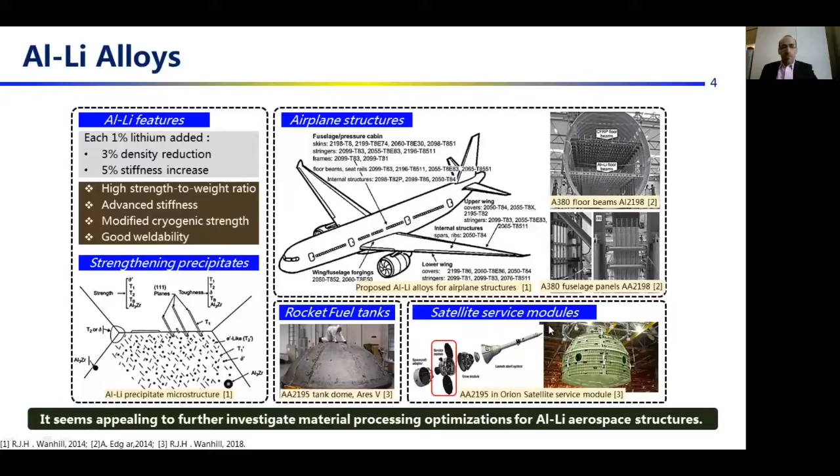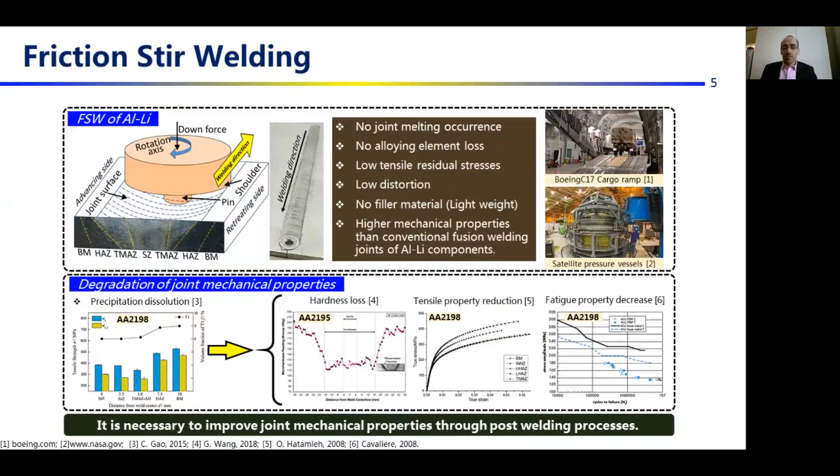However, the dissolution of precipitate phases during the thermomechanical effects of friction stir welding leads to the degradation of joint mechanical properties such as hardness, tensile strength, and fatigue properties in the joint center. So it's necessary to improve the joint mechanical properties by post-welding processes.

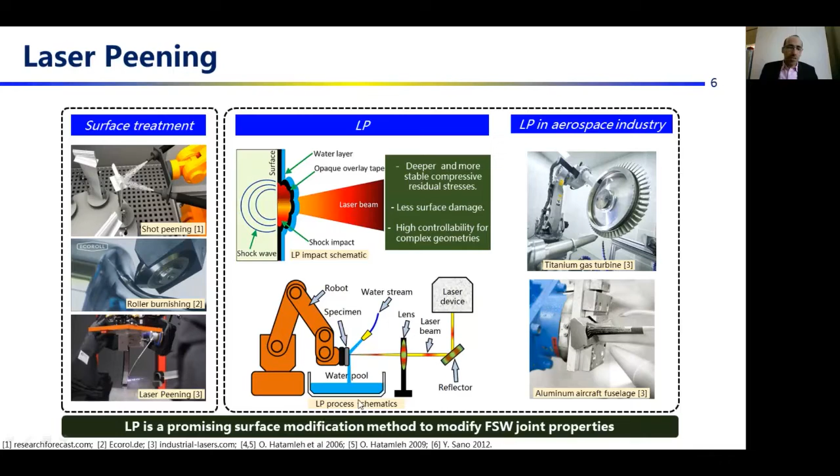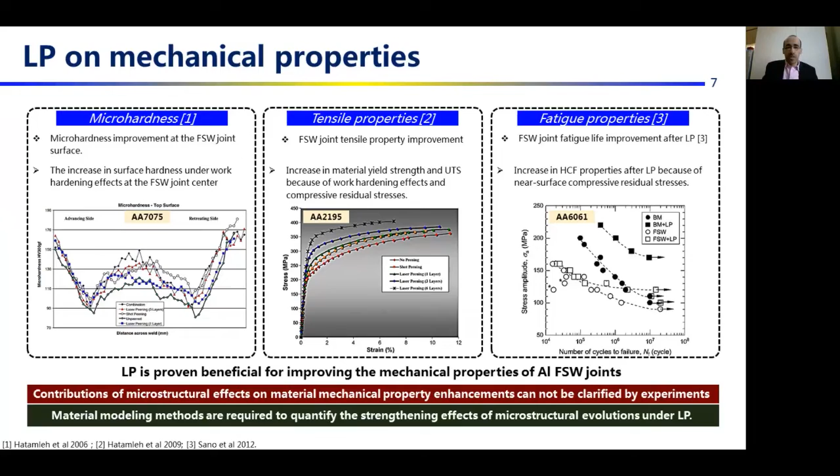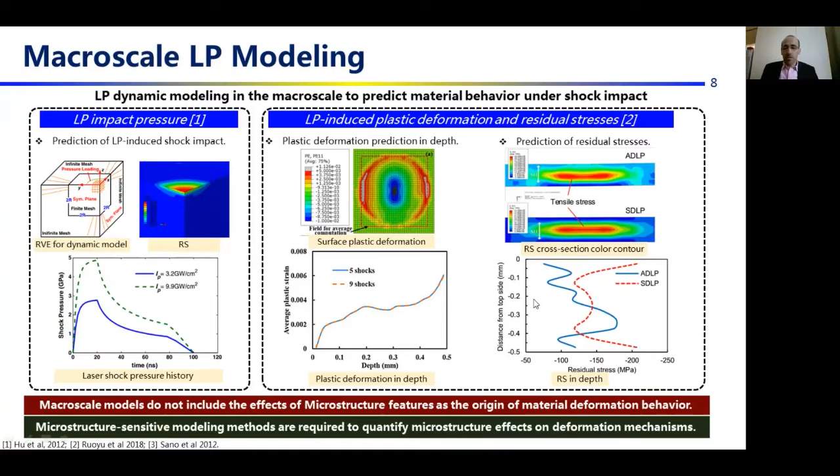Dynamic modeling of laser peening at the macro scale has been developed to predict the laser shock pressure history, as well as the material plastic deformation under laser peening and the resulting residual stresses in the material after laser peening. However, macro models do not include the effects of microstructural features as the origin of material deformation behavior. For this purpose, microstructure sensitive modeling methods are required to quantify the microstructure effects on the deformation mechanism.

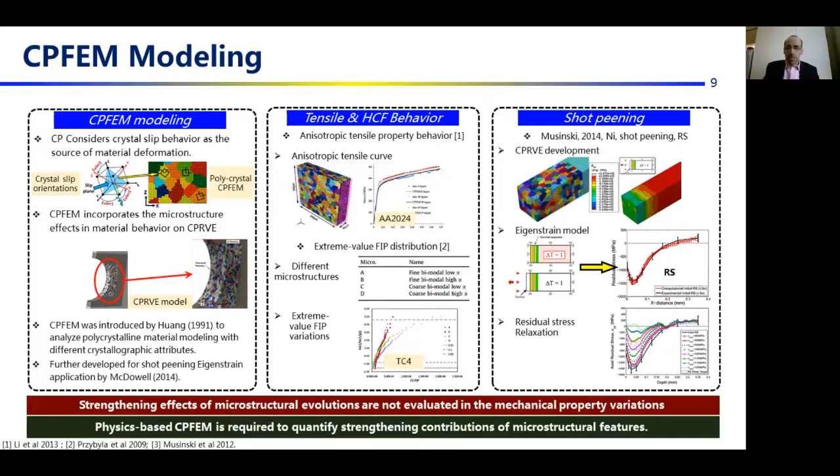However, the strengthening effects of microstructural evolution are not evaluated in the mechanical property variations in this process. For this purpose, physics-based CPFEM is required to quantify the strengthening contributions of microstructural features during material processing.

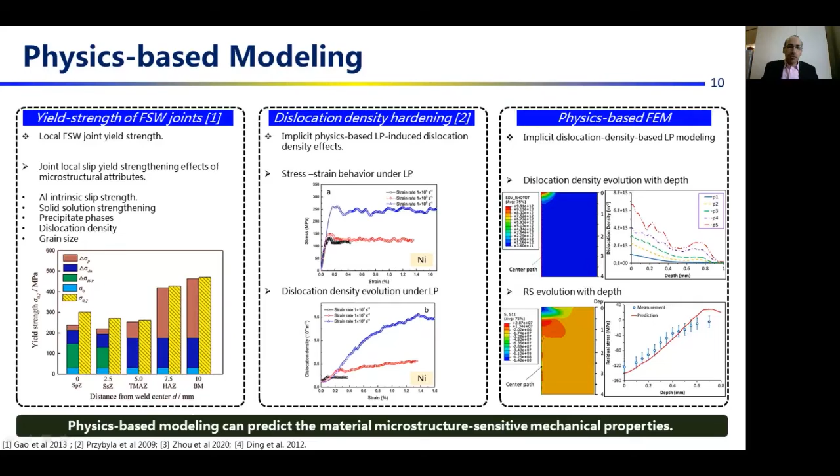To summarize the literature, CPFEM has been introduced to predict the microstructure-sensitive material deformation behavior. CPFEM shot peening models have predicted texture effects on the shot peening-induced residual stress distribution, and physics-based modeling methods also have been developed to predict the FSW joint local yield strength.

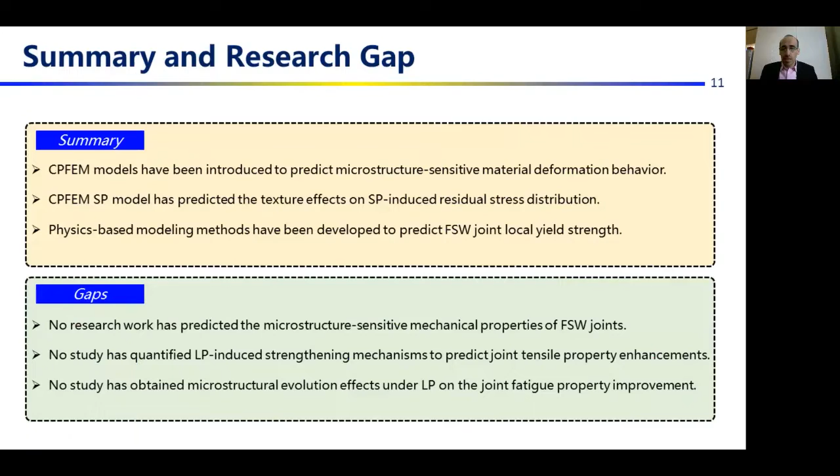However, no research work has predicted the microstructure-sensitive mechanical properties of FSW joints, and no study has quantified the laser peening-induced strengthening mechanism from the microstructure-wise perspective to predict the joint tensile property enhancement. No study has also obtained microstructural evolution effects under laser peening on the joint fatigue property improvement.

In this research, we developed the physics-based CPFEM model to quantify the strengthening contribution of microstructural variations such as precipitate phases, grain size, dislocation density, and crystal morphology during material processing such as FSW and laser peening, to predict the resulting mechanical properties such as tensile strength, fatigue strength, failure mechanisms, and mechanical property heterogeneity.

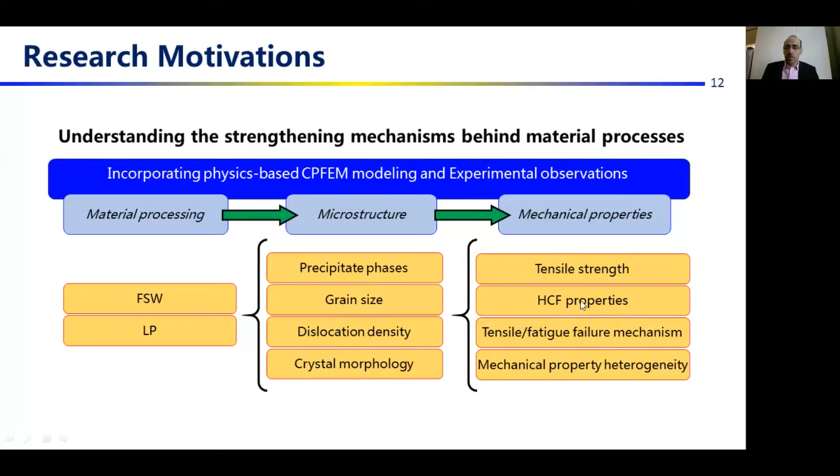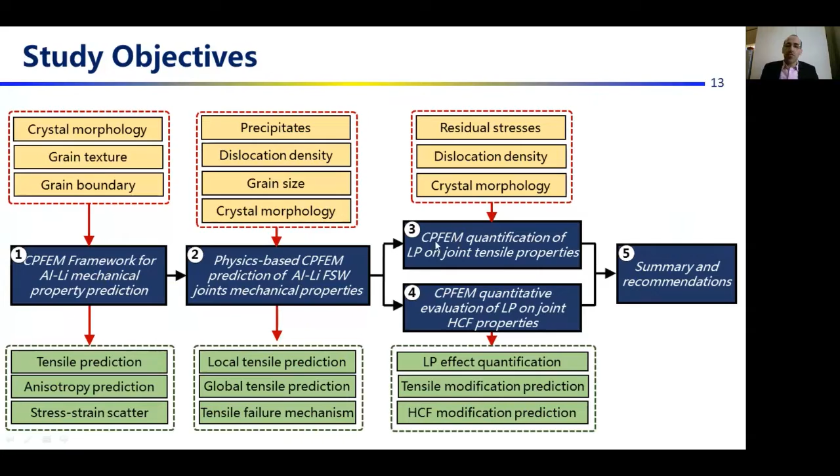For this purpose, a CPFEM framework is developed for aluminum lithium alloys to predict mechanical properties. Subsequently, physics-based CPFEM is developed to predict the microstructure-sensitive mechanical properties of FSW joints of aluminum lithium alloys, and the laser peening beneficial effects on their tensile properties and fatigue strength.

First, the CPFEM framework for aluminum lithium alloys. In this study, CP-RVE or CPFEM models are developed by extracting the microstructure, crystal texture, and grain morphologies from EBSD, and calibrated by mechanical properties from tensile tests. The developed model can predict texture-induced anisotropic tensile properties in the rolling and transverse directions, and grain boundary effects on stress-strain heterogeneity in the CPFEM model.

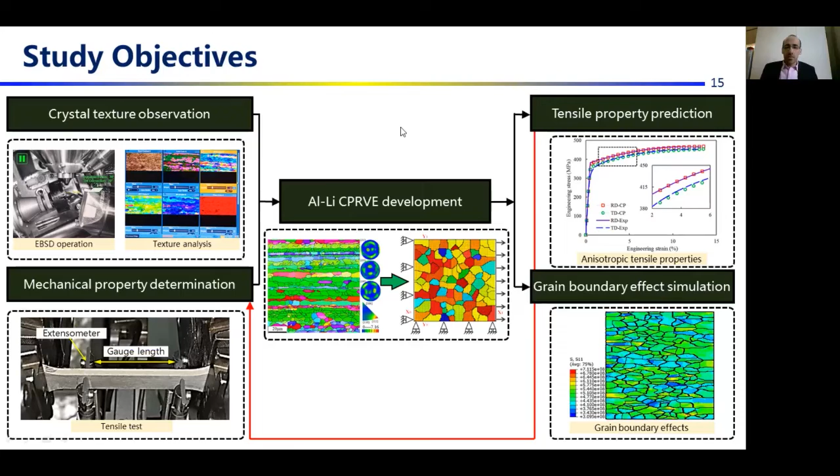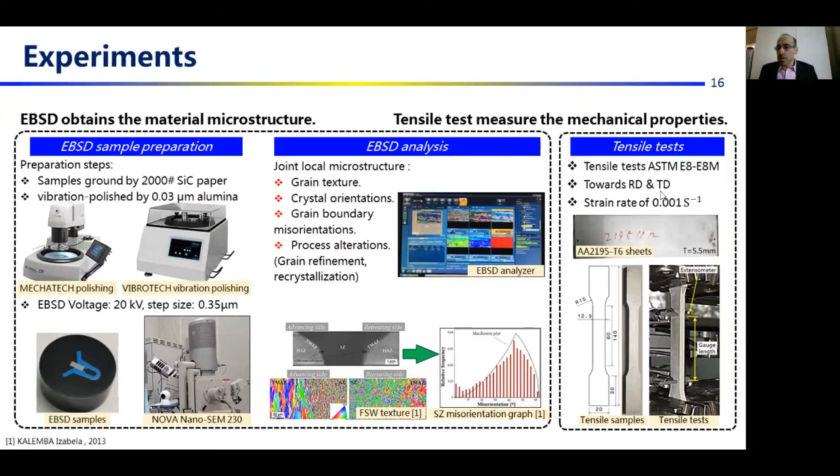For the experiment, EBSD obtained material microstructures such as grain texture, crystal orientations, and grain boundary misorientation. Samples are polished and vibration polished prior to laser peening and the EBSD test, which is conducted with a NOVA Nano SEM machine. Tensile tests also measure tensile properties along the rolling and transverse directions to obtain anisotropic material properties.

CP modeling includes considering crystal lattice rotation and slip as the source of material elastic-plastic deformation. It calculates the plastic velocity gradient, critical resolved shear stress (the slip strength), and flow rule, which defines the slip shear strain rate.

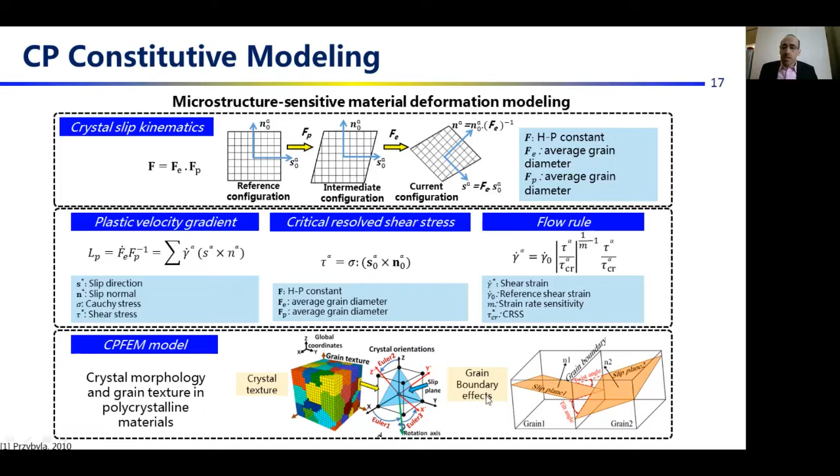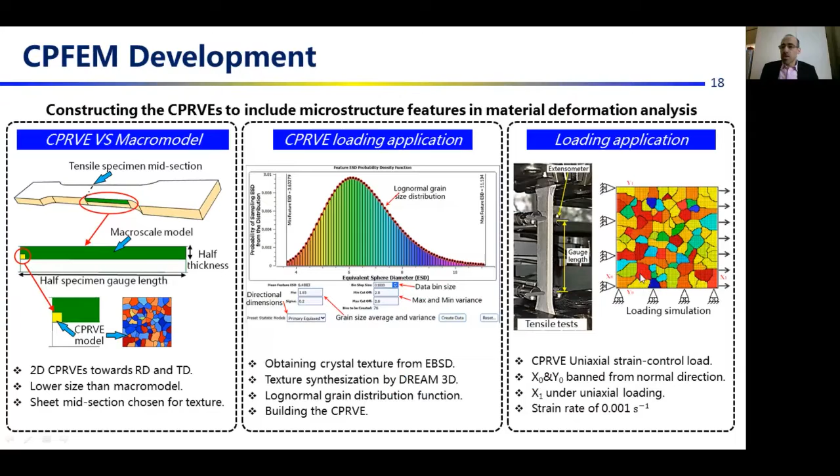The CPFEM model includes crystal texture and grain boundary effects into the microstructure-sensitive model. For CPFEM development, 2D CPRVEs are developed for rolling and transverse directions, and material microstructure is synthesized by DREAM 3D software into the CPFEM model. Loading application is simulated by strain-controlled loading on the CPRVE models to simulate the tensile test.

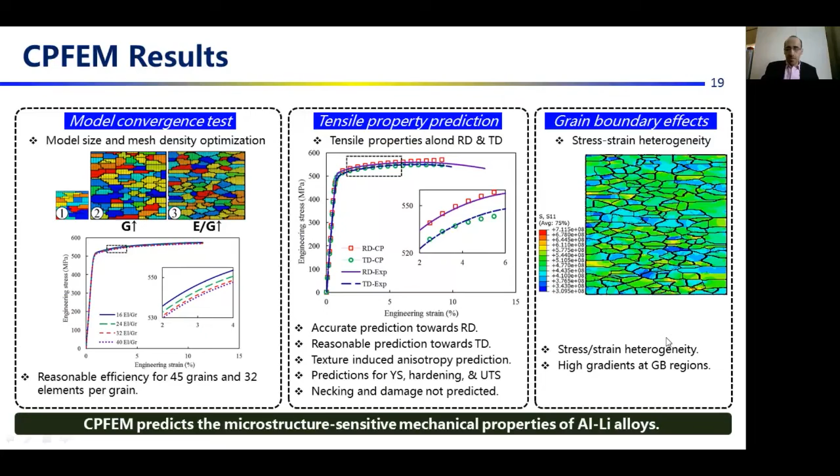As for the overall conclusion, the CP model can predict microstructure-sensitive material deformation behavior. The developed CPFEM model can predict texture-induced anisotropic tensile curves of aluminum-lithium alloys for rolling and transverse directions, and can also predict polycrystalline deformation behavior by including interaction between neighboring grains with crystal misorientation.

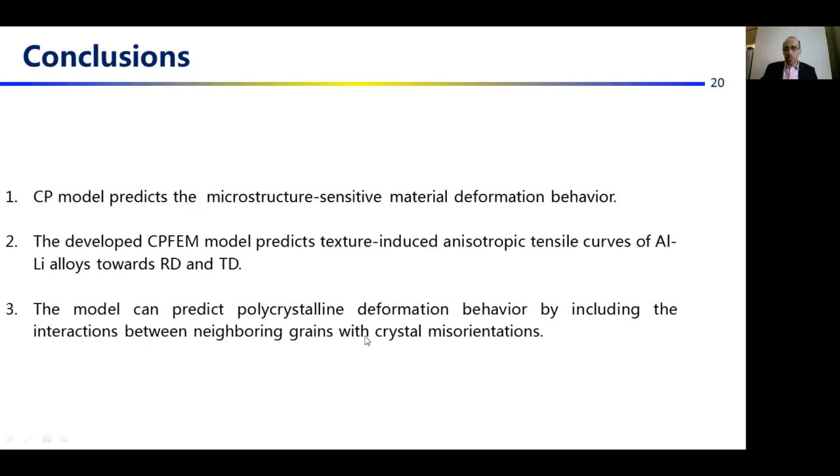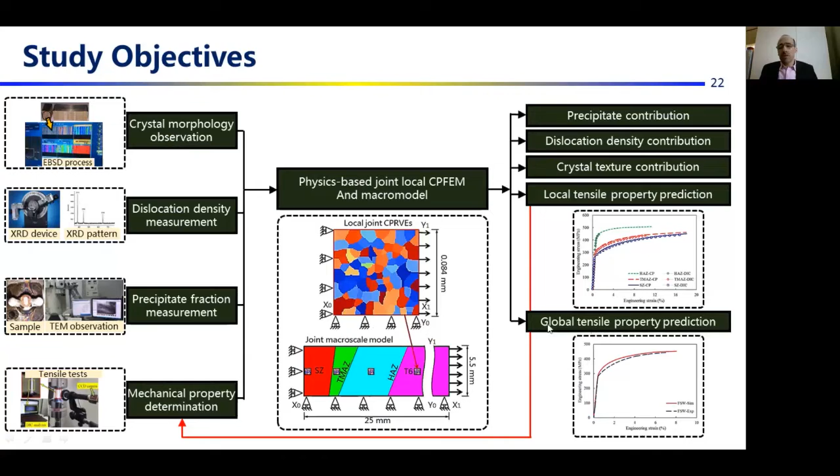Now, the physics-based CPFEM model for aluminum-lithium FSW joints. In this study, joint local physics-based CPFEM models are developed by including material microstructure attributes such as crystal morphologies, dislocation density, and precipitates. The developed model quantifies the strengthening contribution of these microstructural attributes to predict local and global tensile properties of FSW joints.

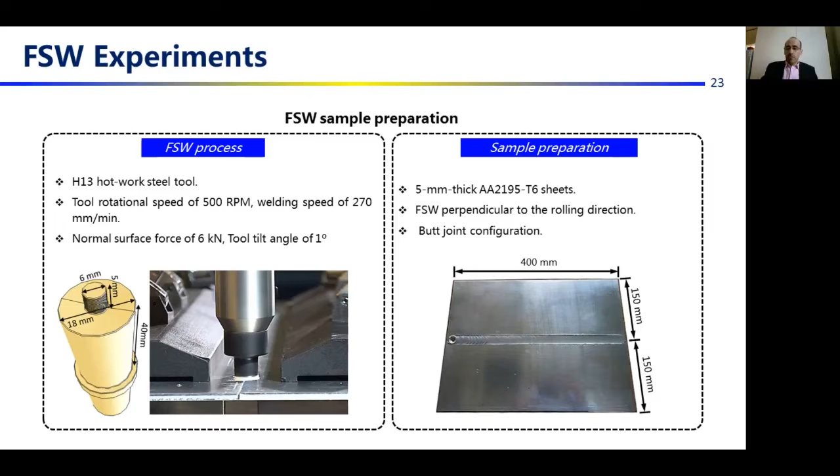For the experiments, FSW process parameters are set for optimum welding joint mechanical properties, and 5 millimeter thick aluminum lithium 2195 sheets in the T6 condition are joined together in a butt joint configuration perpendicular to the sheet rolling direction.

TEM tests are conducted, and the Talos F200X TEM device is utilized for the TEM test, which shows precipitation types and dislocations, and also reveals grain boundary effects.

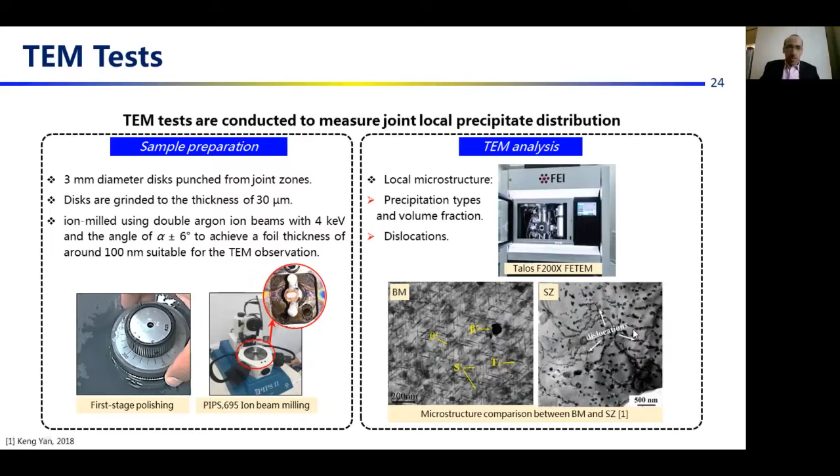The DIC test includes the DIC method to measure the joint's local and global tensile properties. They include a low strain rate to secure homogeneous deformation throughout the joint. Random black dots are spread on the observation surface for the camera to observe material deformation, with a CCD camera for process observation.

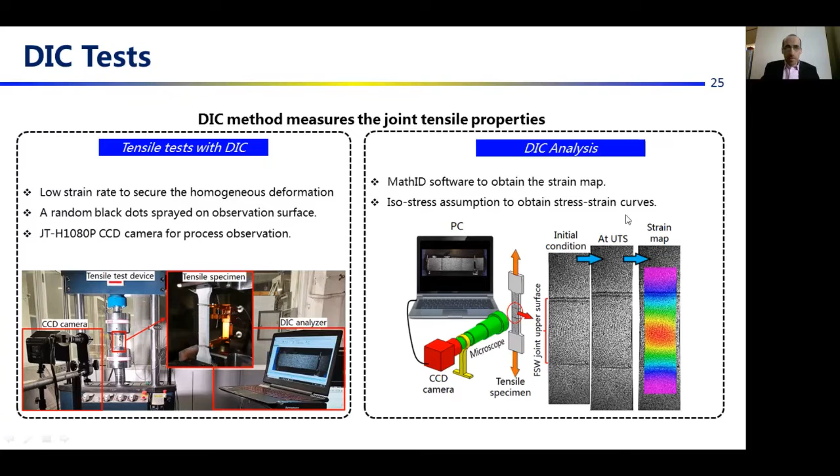For DIC analysis, the Match ID software obtains strain maps from the initial condition in the tensile test of the joints up to the UTS, and an iso-stress assumption is also used to obtain stress-strain curves from the DIC results.

Physics-based CP modeling includes the slip strengthening effect of precipitate phases, dislocation density, and grain size, and considers the total critical resolved shear stress, which is the total slip strength, as the summation of each of these independent effects. Finally, plastic hardening represents variations in dislocation density during plastic deformation.

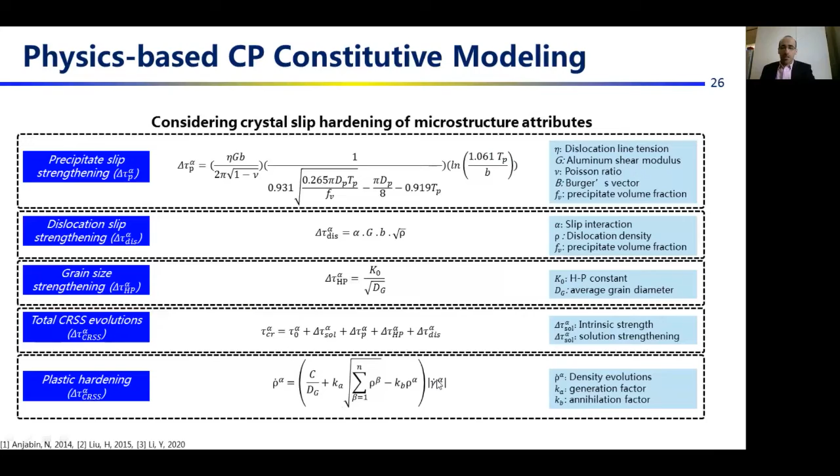For the CPFEM development, first, the micro-hardness test showed low variation in mechanical properties through the thickness, with average values seen in the midsection of the joint. So the joint local CPRVEs are considered at the midsection of each zone at the mid-thickness of the sheet, and homogeneous mechanical properties are assumed for each zone, meaning the mechanical properties in the CPRVE model are assumed to be homogeneously distributed in the corresponding zone.

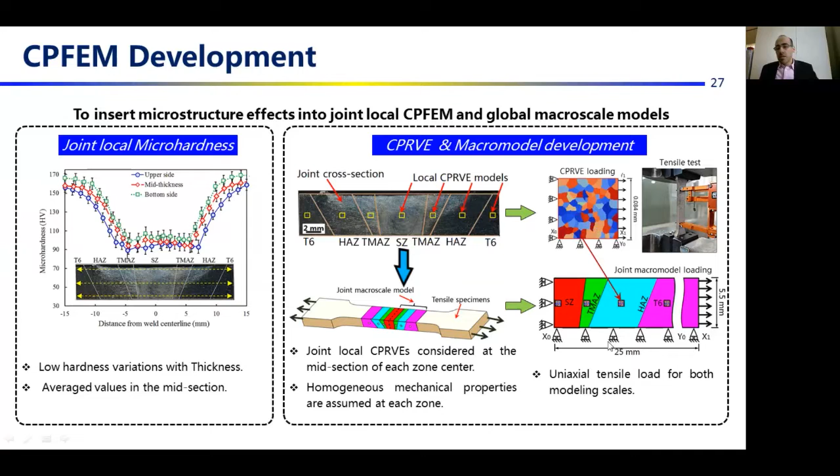The tensile tests are simulated for both the CPRVEs and the macro model of the joint to obtain the local and global tensile properties of the FSW joints.

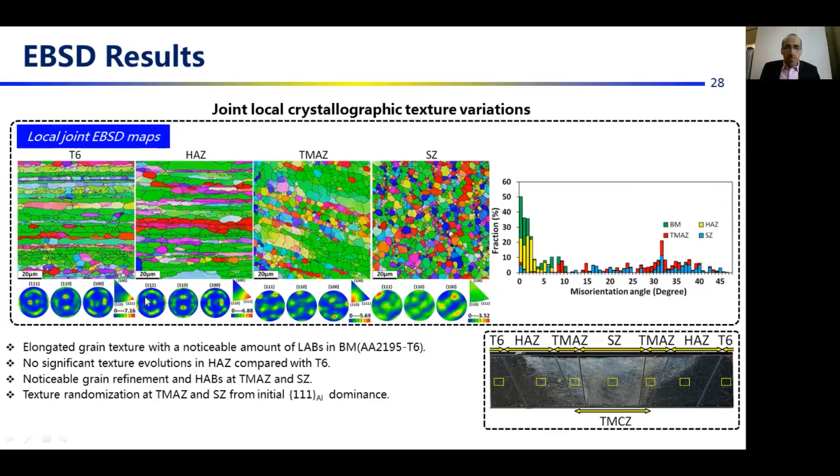From the EBSD results, we see the elongated grain texture with a noticeable amount of low angle grain boundaries at the T6 condition, because of the high plastic deformation during rolling, and no significant texture evolution in the HAZ compared with T6 under the thermal effects of the FSW. There is noticeable grain refinement and high angle grain boundaries at the TMAZ and at the joint center because of high recrystallization and plastic deformation. Texture randomization is also observed from the dominance of 111 planes at the base material, and you can see completely randomized texture in the stir core.

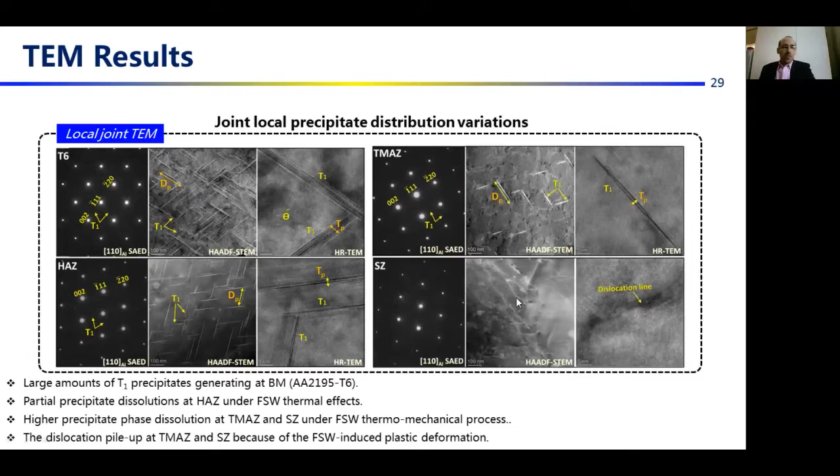Also, texture randomization can be seen from the dominance of 111 texture to a relatively randomized texture at the joint center, at the stir core.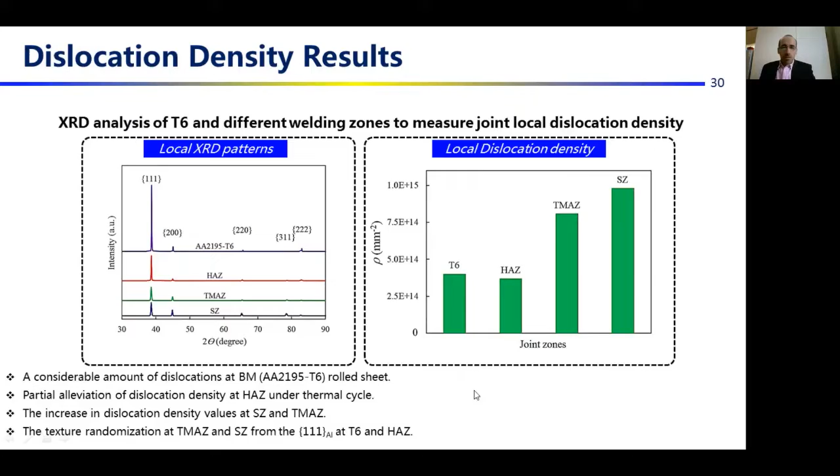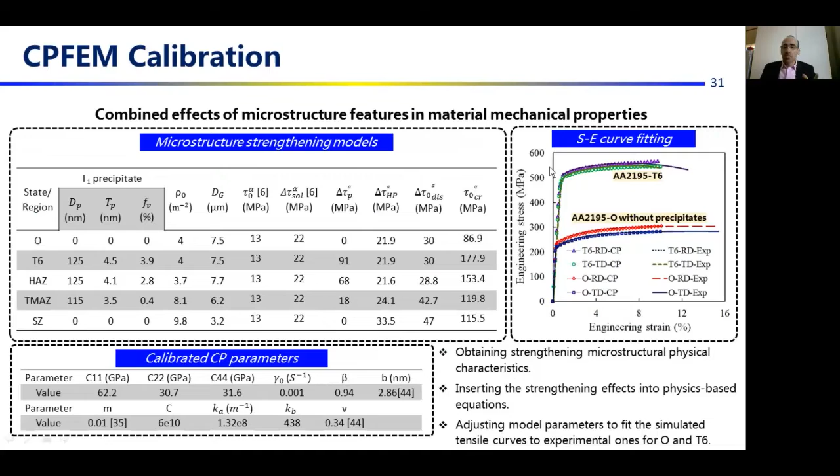CPFEM calibration includes obtaining the strengthening microstructural physical characteristics such as precipitates and dislocation density, inserting the strengthening effect into the physics-based equation to obtain the slip strengthening effect, and adjusting model parameters to fit the simulated tensile curve to experimental ones for the O-state material without precipitate and the T6 condition to fit the simulated and experimental tensile test.

For the joint local mechanical properties, the stir zone has the lowest yield strength because of the dissolution of precipitates, but it has the highest hardening slope and total hardening amount because of its lower grain size. It's followed by the TMAZ, which has higher yield strength because precipitate still exists there, and the HAZ has the highest yield strength, but the hardening slope is lower because of higher grain size.

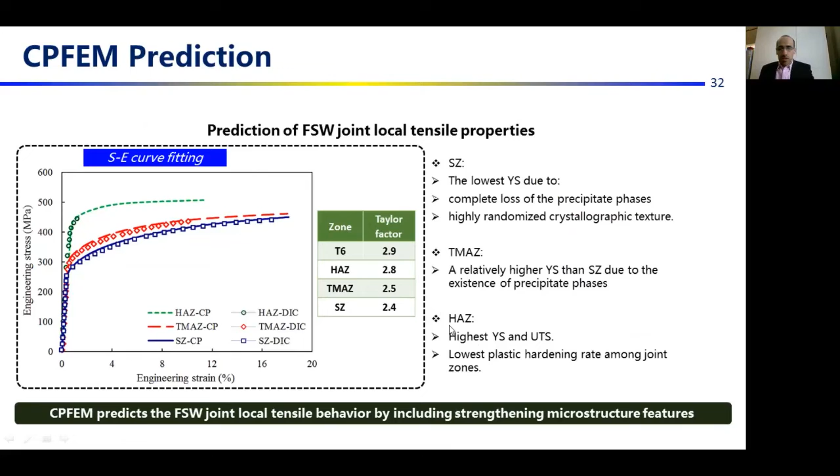Macro model predictions also show consistent results with the experiments, and failure occurs before the predicted UTS at the stir zone locations. Larger strain values are observed at the welding joint center because of its lower yield strength, and we can see the stress-strain concentration at the TMAZ-HAZ border because of the mechanical property heterogeneity.

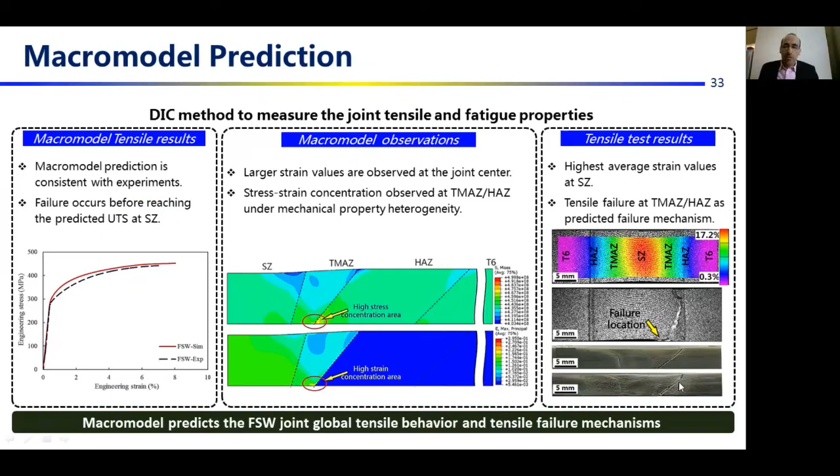The tensile failure results from the experiment show higher average strain values at the stir zone, but the failure occurs at the predicted stress-strain concentration area, which validates the macro model results. Tensile failure happens at this location.

For the overall conclusion, the developed physics-based CPFEM model can predict the local tensile properties of FSW joints by quantifying strengthening effects of the joint's local microstructure. The local loss of T1 precipitate phases and crystallographic texture randomization lead to a noticeable decrease in joint mechanical properties, and high stress-strain concentration at the HAZ-TMAZ interface, caused by joint mechanical property heterogeneity, leads to early joint tensile failure.

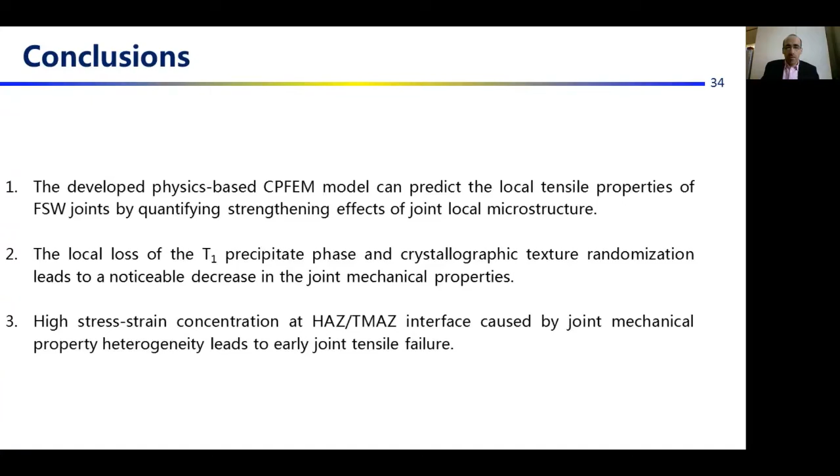Now, the CPFEM for laser peening effects on joint tensile properties.

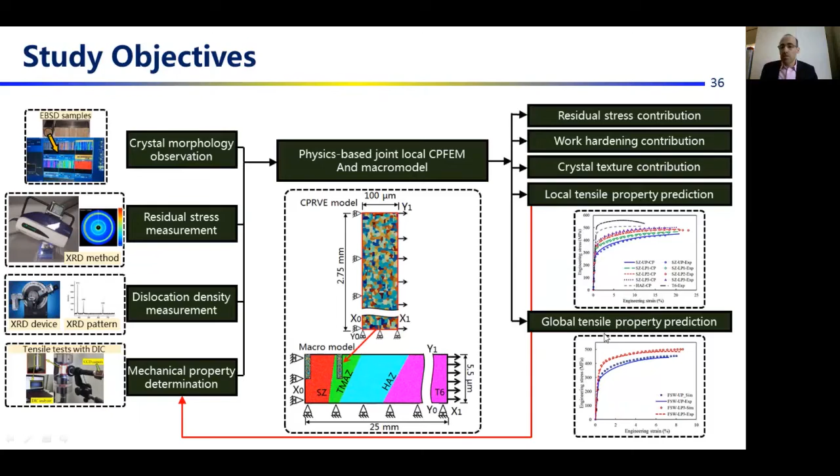In this study, joint local physics-based CPFEM models are developed by including microstructure attributes such as crystal morphology, residual stresses, and dislocation density. This model will quantify the strengthening contributions of laser peening-induced residual stresses, work hardening, and crystal texture variations to predict the improvement in joint local and global tensile properties after laser peening.

For the laser peening experiments, double-sided multiple laser peening is applied on both sides of the joints up to 3 layers, at the joint center where lower mechanical properties were observed.

The laser is applied with a power of 10 joules, which asserts the laser spot with 4 millimeters in diameter on the surface, and laser peening is applied with a zigzag pattern to cover all over the joint central areas. Subsequently, tensile specimens are cut from the laser peened samples.

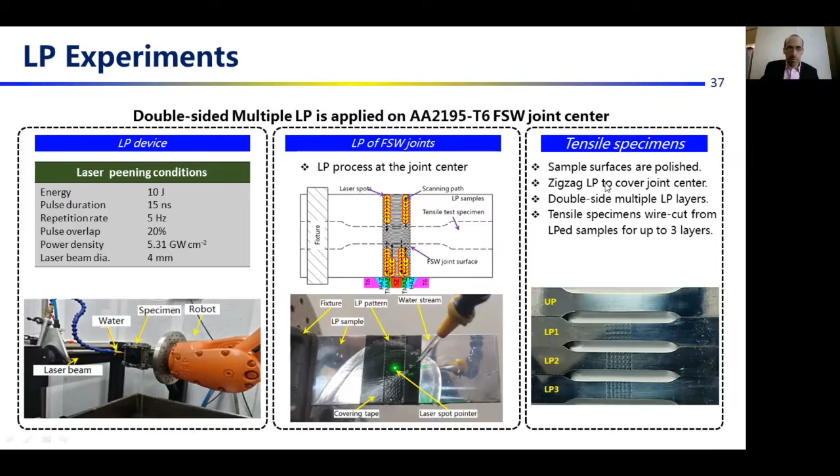XRD method measures the multiple laser peening-induced near-surface residual stresses. XRD tests are applied by the Pulstec device, and electrolytic corrosion drilling is also used to reach the subsurface areas to measure the residual stresses in the subsurface. The cosine measurement method in the two-dimensional detection technique is used for measuring the residual stresses because of its lower errors compared with the conventional sin²ψ method.

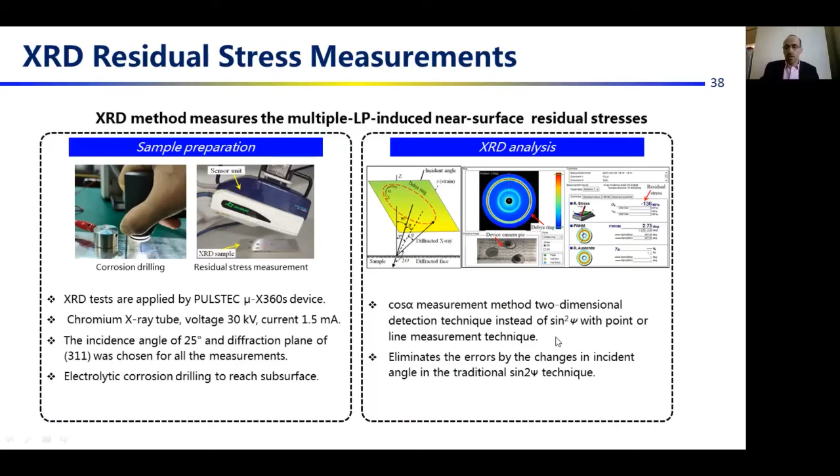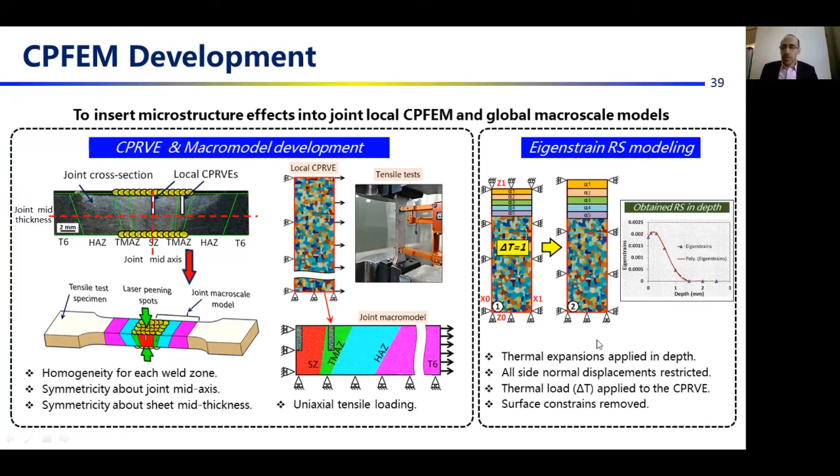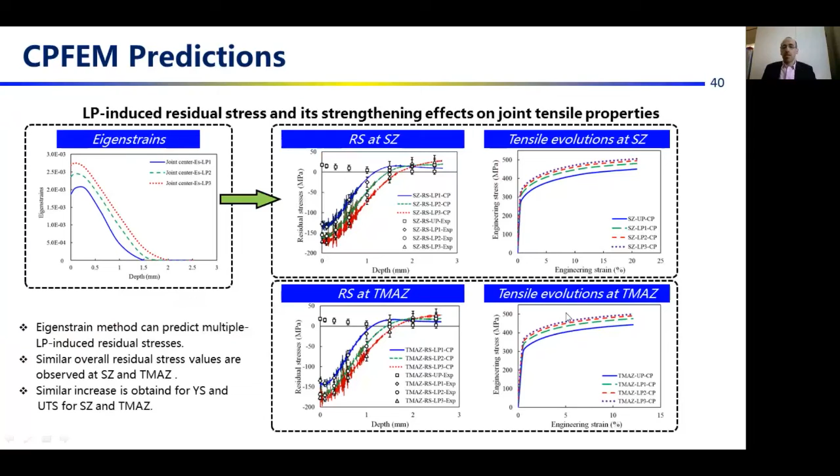From the CPFEM predictions for the contributions of residual stresses, the eigenstrain method can predict the multiple laser peening-induced residual stresses, and similar overall residual stresses are observed for SZ and TMAZ, and similar increase is also observed for the yield strength and UTS for both areas.

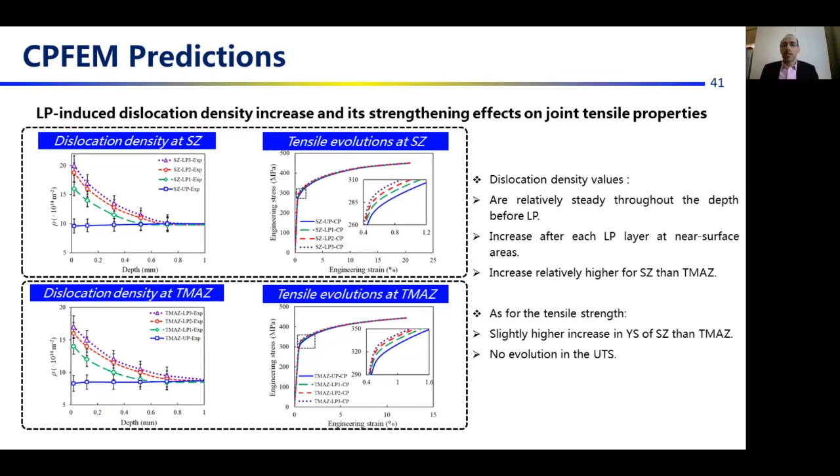As for the tensile strength, a slightly higher increase in yield strength is also observed at SZ than TMAZ, and work hardening doesn't affect the material UTS, it only increases the yield strength.

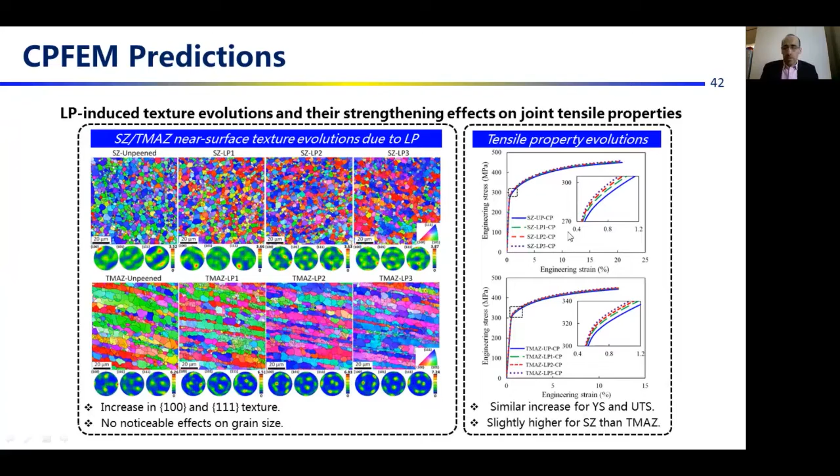From the tensile property improvement, we can see similar improvement in yield strength and UTS, just like the residual stress effect, with a slightly higher improvement effect on SZ than TMAZ because of the higher plastic deformation from laser peening in SZ.

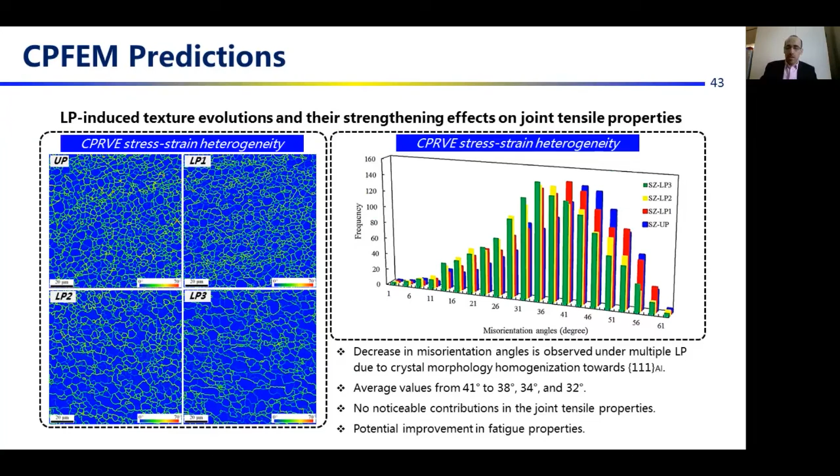For the crystal misorientation contribution, we can see the decrease in misorientation angles under multiple laser peening due to the crystal morphology homogenization towards the 111 plane. This has no noticeable effect on tensile properties, but it has potential effects on the improvement in joint fatigue strength, which will be explained later.

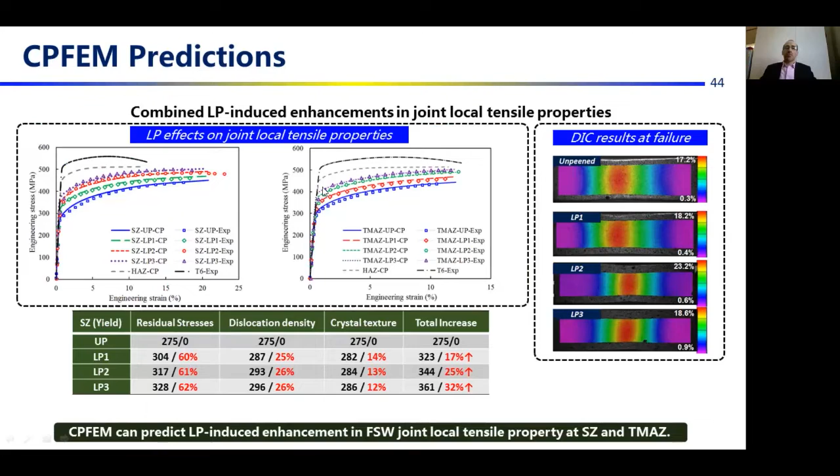As laser peening layers are applied, the gap between the TMAZ and HAZ tensile properties is also closing, which is the homogenization effect of laser peening.

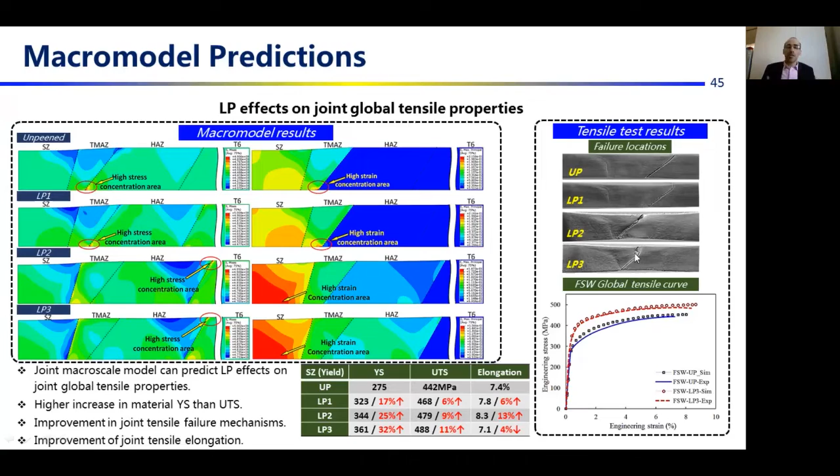From the experiments it can be seen that the failure location relocates from the border to the central area, which increases both tensile strength and elongation.

For the overall conclusion, the developed physics-based CPFEM model can predict the laser peening-induced improvement in joint tensile strength. The highest laser peening contribution in joint local yield strength belongs to compressive residual stresses, followed by work hardening and crystal morphology variations. Laser peening effects on the joint center improve joint mechanical property homogeneity, causing improvement in both joint tensile elongation and strength.

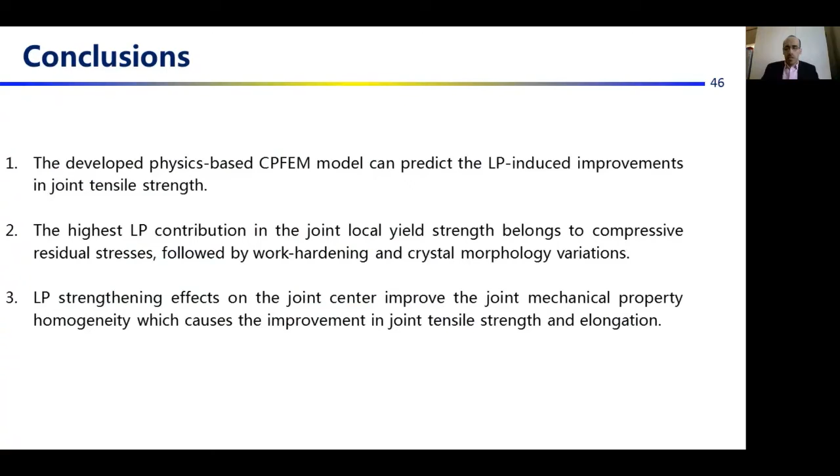Now the CPFEM for laser peening on joint high cycle fatigue properties. In this study, a CPFEM model is developed at SZ, which is the failure location of the fatigue test, by including microstructure effects such as crystal morphology, residual stresses, and dislocation density.

The developed model quantifies the effects of laser peening-induced residual stresses, work hardening, and crystal texture on the variations of extreme value FIP and also grain average FIP values in depth, to evaluate the laser peening effects on joint fatigue properties.

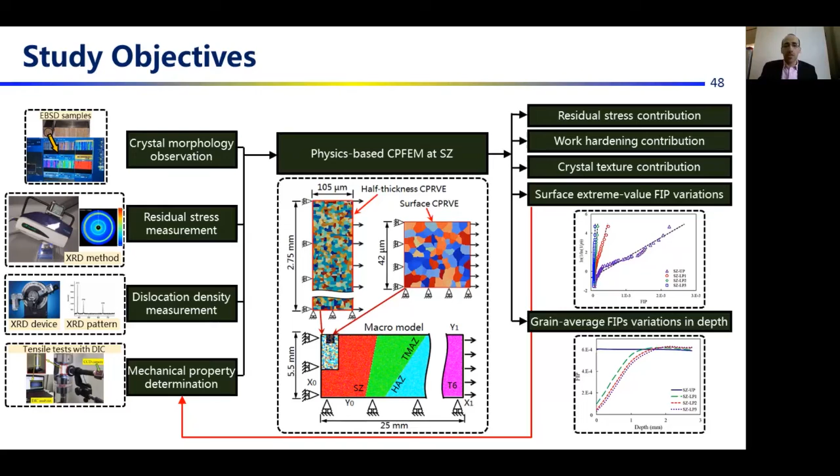For the high cycle fatigue test, to obtain the multiple laser peening effects on joint fatigue properties, laser peening is applied with the same pattern to cover all over the joint area, and fatigue specimens are cut from the laser peened samples.

Fatigue tests are conducted with the stress control regime, with the maximum stress of 200 megapascals and a stress ratio of 0.1, up to sample failure.

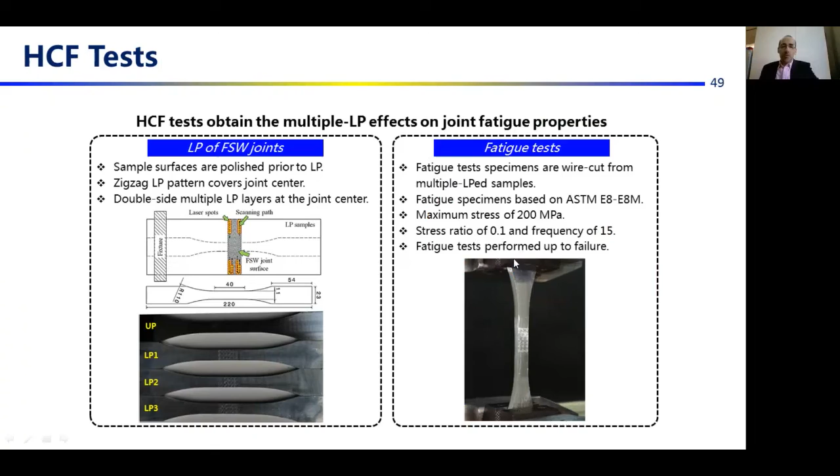For the HCF modeling, FIPs have been developed based on the critical plane approach to obtain the driving force for fatigue crack initiation and growth, reduce the computational cost of fatigue simulation, and predict the material fatigue life.

Different approaches have been utilized, such as a stress-based approach and a strain-based approach developed for FIP, among which the Fatemi-Socie FIP parameter can reasonably predict the material HCF properties by considering the maximum normal crystal slip stress, cyclic stress, and plastic shear strain as the mechanisms behind the formation of fatigue crack failure.

Extreme value FIPs analyze the high cycle fatigue properties as regions with high probability of fatigue crack formation, such as the grain boundaries of hard and soft grains with high crystallographic misorientation.

FIP extreme value Gumbel distributions have been developed to statistically characterize the HCF properties at grain boundaries with statistical parameters such as UN, which characterizes the highest extreme value FIP in the population, and alpha N, which is the inverse measure of the largest value dispersion around the maximum value FIPs.

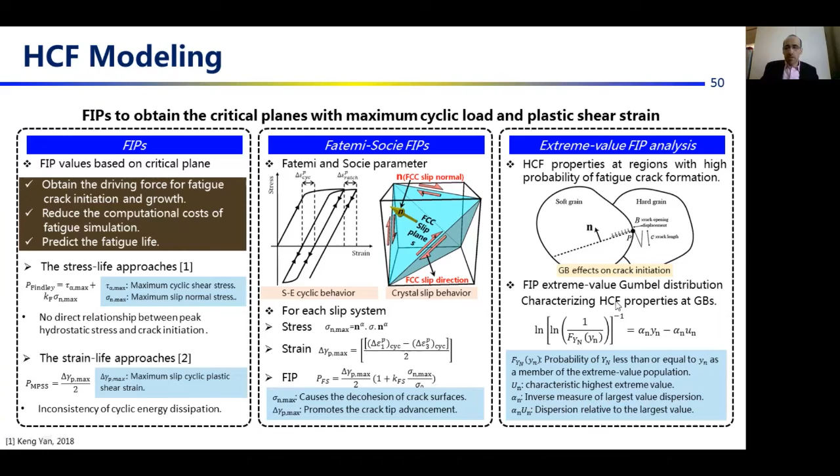For CPFEM development, the high cycle fatigue enhancement is evaluated based firstly on extreme value FIP variations at grain boundaries near the surface where failure happens for the unpeened condition, to predict the laser peening modifications in joint surface integrity, and then grain average FIPs to predict the high cycle fatigue property modification in depth and fatigue failure mechanism modification.

For this purpose, surface CPRVEs are developed to obtain the extreme FIP values on the surface and their variations with laser peening, and the grain average CPRVs are developed to obtain the grain average FIPs in depth after laser peening to obtain the failure mechanism variation.

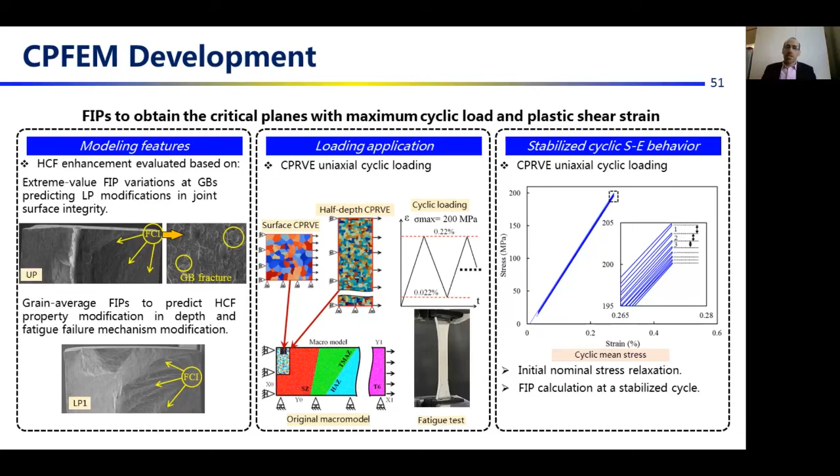Loading applications are simulated based on the experiment with the stress controlled regime, with the highest stress of 200 megapascal and stress ratio of 0.1, corresponding to the experimental HCF test. The stabilized stress strain cyclic loading is considered for the calculation of FIP parameters, which represents the rest of the high cycle fatigue loading after the initial relaxation of the mean stress.

From the extreme value FIP results, you can see from the CPRVE that stress strain concentration occurs at the boundary of hard and soft grains with high amounts of misorientation, and high accumulation of cyclic plastic strain is observed at these regions. This leads to the extreme FIP value occurring at these soft-hard grain boundaries, showing high fatigue sensitivity at the soft side of these boundaries.

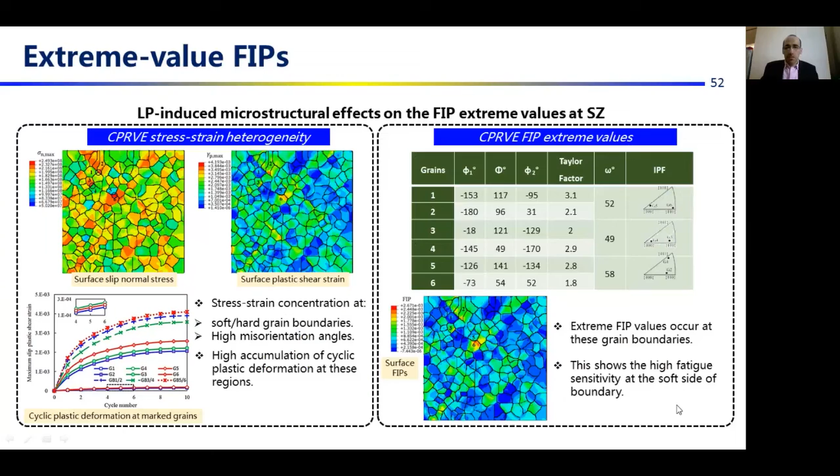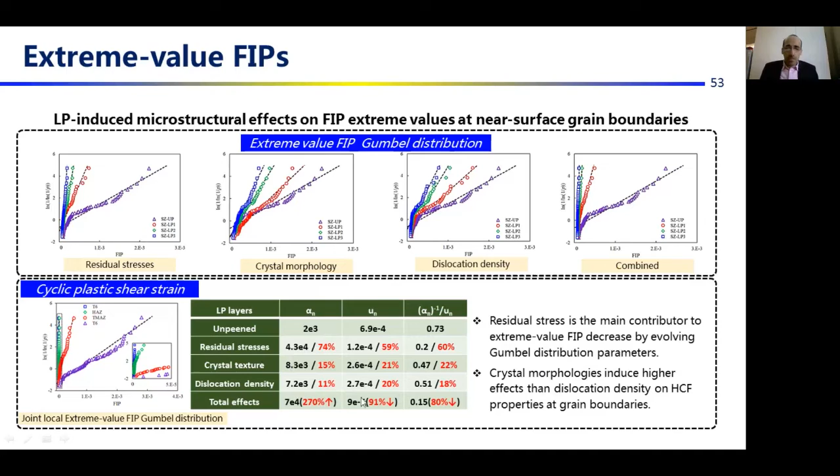For the laser peening effects on the extreme value FIP, from the statistical Gumbel distribution data, we have the residual stress as the main contributor to extreme value FIP decrease by evolving the Gumbel distribution parameters. It is followed by crystal morphology effect, which has a higher effect than dislocation density because of the decrease in grain boundary misorientation, with dislocation density having a lower effect.

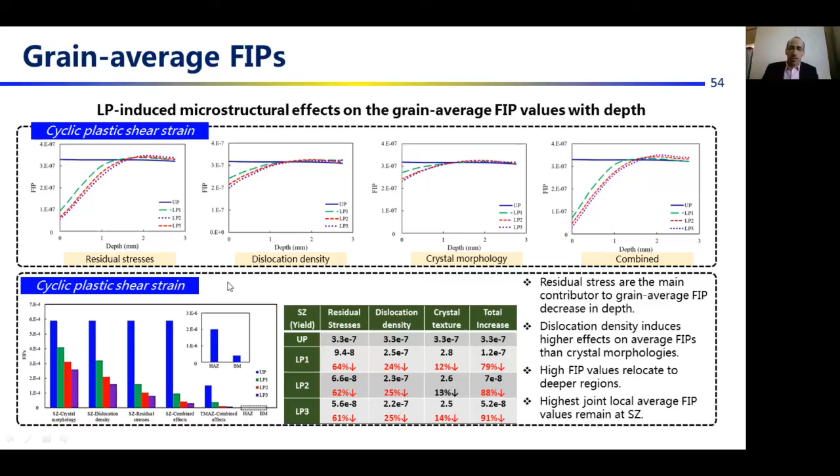From the grain average FIPs, residual stresses remain the main contributor to grain average FIP decrease, followed by dislocation density which induces higher effects in magnitude and depth than the crystal morphology effect. High FIP values relocate to deeper surface regions where fatigue failure is more likely to happen after laser peening, yet the highest joint local average FIP still remains at the SZ area after laser peening, showing that fatigue location is less likely to change after laser peening.

The high cycle fatigue test shows fatigue failure happening at SZ for all laser peening conditions, which validates the modeling results. HCF improvement can be observed for both the aluminum lithium alloy and the FSW joints, and it's more noticeable at lower applied cyclic stress, showing that laser peening has a higher effect in the high cycle fatigue regime than the low cycle fatigue regime.

The relocation of FCI, the fatigue crack initiation location, further into the depth after laser peening validates the grain average FIP value results. Higher ductile fracture is also observed when FCI relocates to the depth, which is the effect of relocating fatigue cracks to the depth on improving the fatigue life through laser peening.

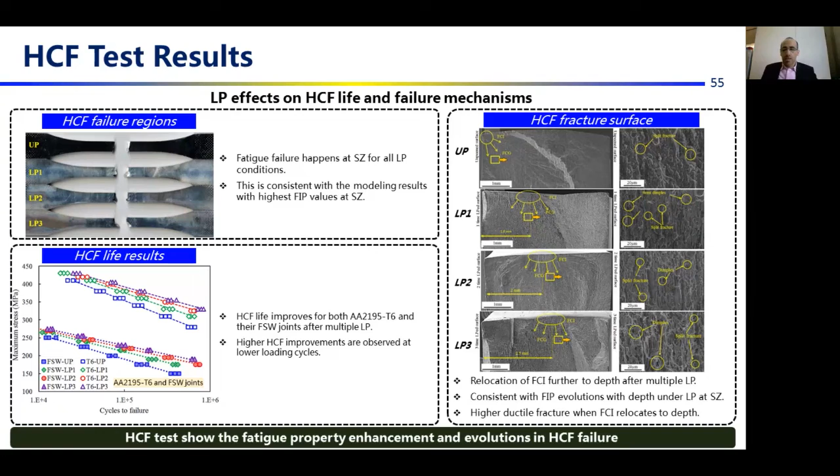For the overall conclusion, the developed physics-based CPFEM can reasonably obtain the laser peening effects on improving joint fatigue properties. Laser pinning induced high cycle fatigue strengthening factors include higher material resistance against cyclic plastic deformation under compressive residual stresses, dislocation density and crystal texture intensity, and the reduction of misorientation under the crystal morphology homogenization effect.

Experimental high cycle fatigue results show enhancement in joint fatigue life by transforming FCI locations to the depth after laser peening, validating the modeling prediction.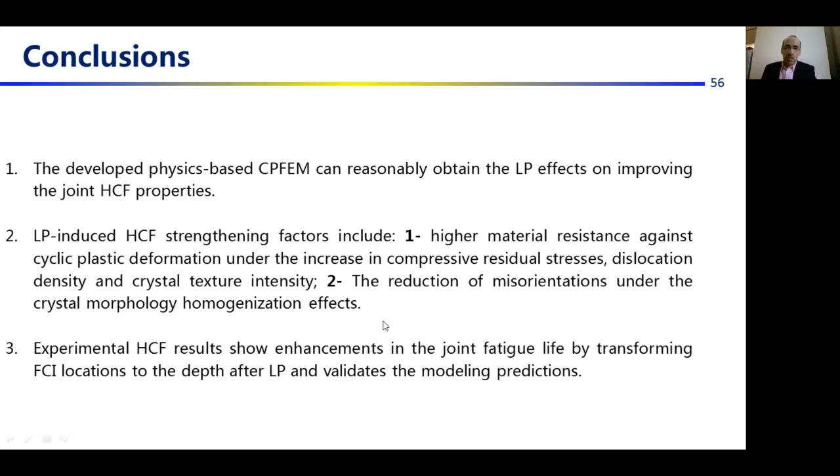Now for the summary and future work: original contributions of this work include proposing an FSW joint physics-based CPFEM to predict joint mechanical properties by quantifying the strengthening contribution of joint local microstructure features, including texture, precipitate, dislocation density, and grain size. The second contribution is developing the physics-based CPFEM laser peening model to quantify the laser peening strengthening effects.

This includes enhancing joint tensile properties by quantifying the strengthening contribution of laser peening induced microstructural evolution such as residual stresses, work hardening, and texture variations, and developing the physics-based CPFEM fatigue model for quantitative evaluation of laser peening effect on improvement of joint high cycle fatigue properties by quantifying the microstructural contributions on the FIP values.

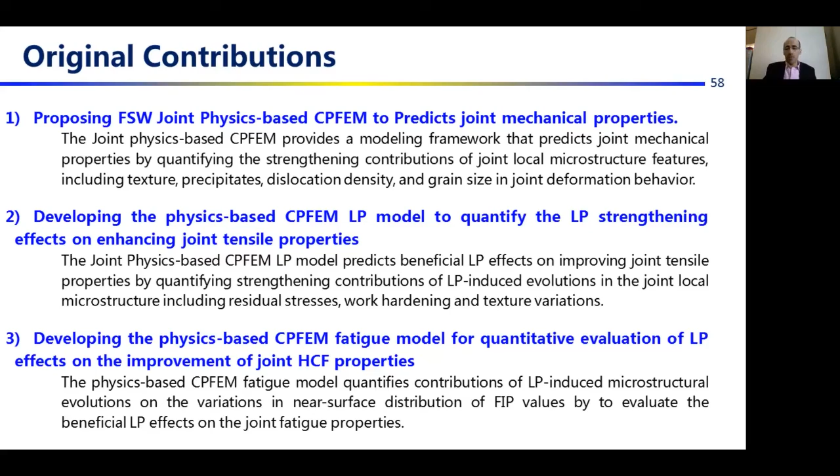For future work, the current model utilizes experimentally measured joint local microstructure to predict joint mechanical properties. However, the physics-based CPFEM model can be further developed to quantify the effects of FSW parameters on the joint local microstructure variations to optimize the joining process.

In the current work, laser peening effects on microstructural features are experimentally measured after laser peening to use as model input. However, a high strain rate physics-based CPFEM dynamic model can be further developed to predict the laser peening-induced microstructural evolution for surface modification optimization.

Finally, the current approach predicts the laser peening effect on the mechanism behind FCI, fatigue crack initiation, relocation to the subsurface. However, the model can be further developed to predict the impact of FCI depth on fatigue life improvement by modifying the FIP equations.